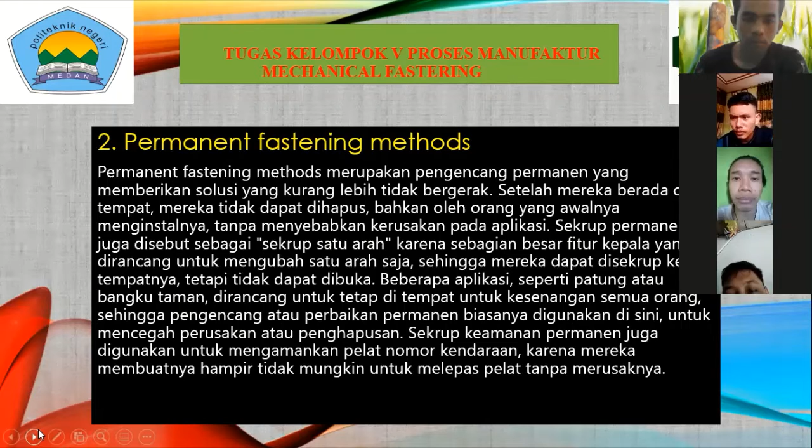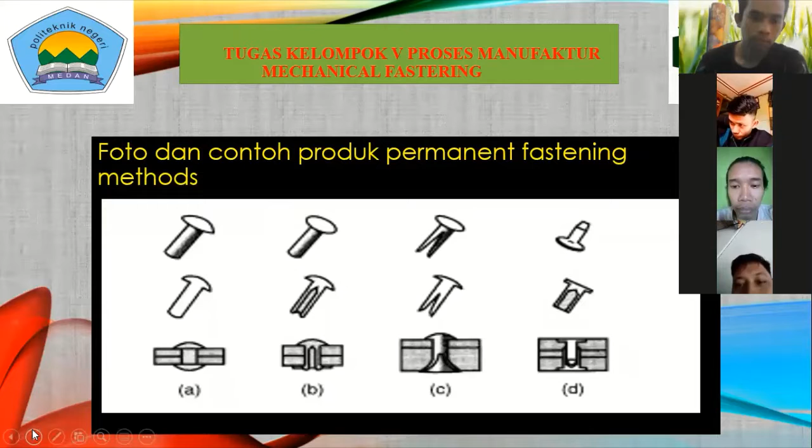If you work with designing, building or repairing things, one of the things that you should know about are the different types of fasteners. When it comes to putting things together, there are always lots of different ways that you can do it. Some materials can be chemically bonded, welded, soldered, or brazed together. Other situations call for adhesives like tape, glue, or epoxy. But today I want to talk about mechanical fasteners and explain the difference between some of the common types that you're likely to run into.

Mechanical fasteners are things like nails, screws, nuts, and bolts that we use to secure things to other things. If you've ever walked into a hardware store in search of a fastener, it would be easy to get overwhelmed by the variety of options available. How do you know which one you need? Fasteners come in different sizes and shapes, with different points, heads, drive types, materials, surface finishes, and surface coatings. There are thousands upon thousands of different varieties of mechanical fasteners, and for a given application there might only be a couple of options that will work properly.

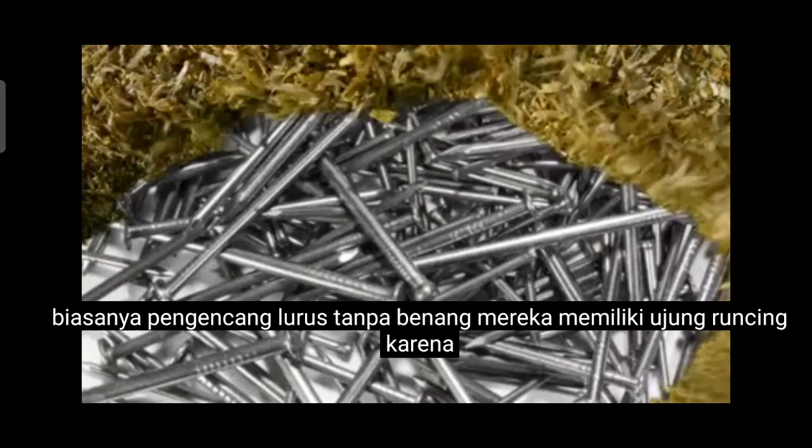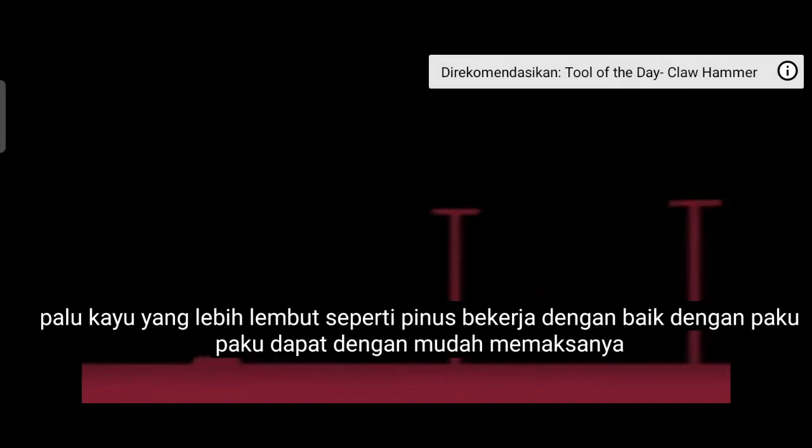The friendly staff at the hardware store can probably help you find what you need, but you don't want to be the ill-informed chump who goes in there not knowing the difference between nails and screws. So let's get down to the basics of mechanical fasteners. Nails are normally straight fasteners without threads. They have pointy tips because they're designed to be pounded into soft materials like wood, usually with a hammer. Softer woods like pine work well with nails. The nail can easily force its way into the soft material, and the wood presses back on the nail to hold it tightly in place.

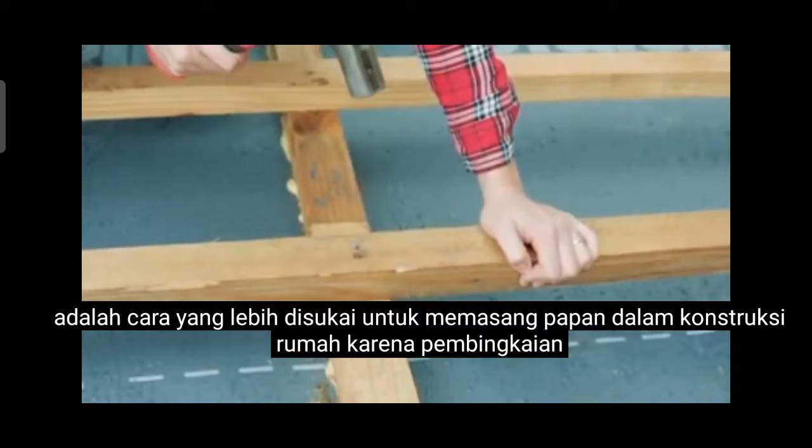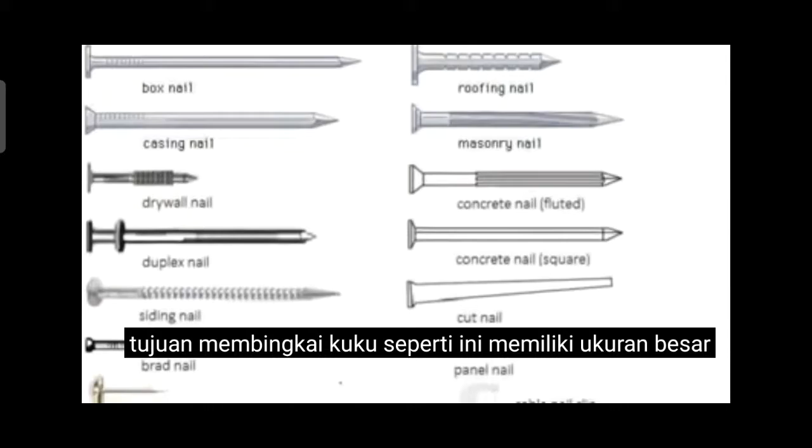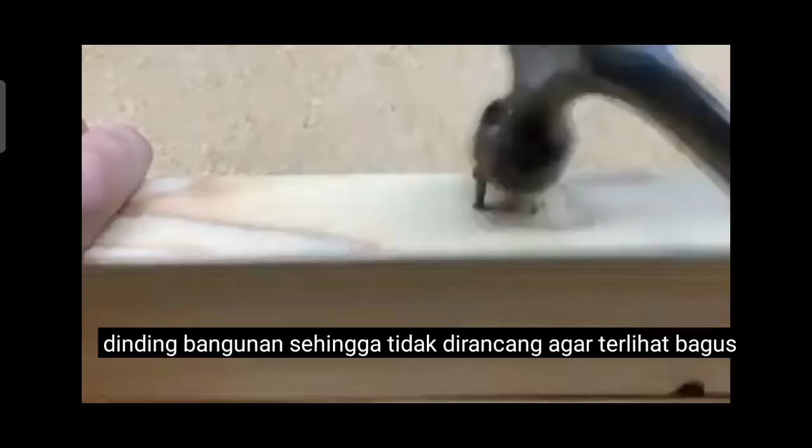Harder woods like oak or maple don't take nails so well, and are likely to split apart when the nails are driven into them. That's why nails are the preferred way to attach boards in home construction, because framing lumber is normally made from soft woods that are easy to nail. Like other fasteners, there are countless different types of nails used for different purposes. Framing nails like this one have large heads that are easy to pound with a hammer, and also easy to pry out if needed. These are usually hidden inside the walls of the building, so they aren't designed to look good. Finish nails are used for applications like trim and molding, where big ugly nail heads would be visible and unpleasant.

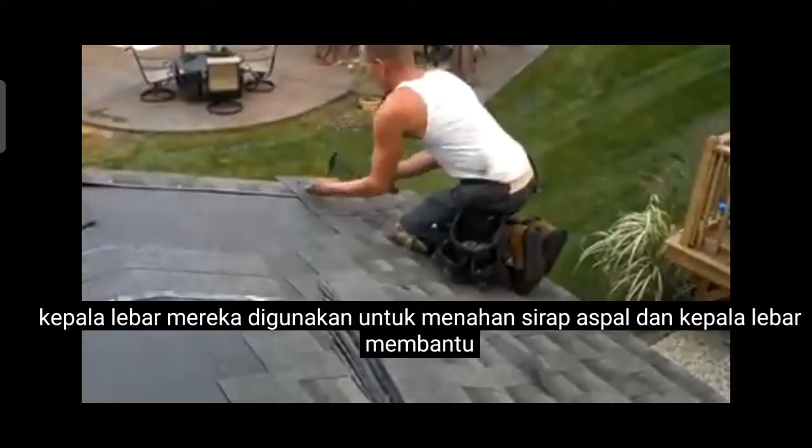Finish nails are thinner, so they'll be less likely to split the wood, and they have tiny little heads that are designed to be hard to see once they're driven in, or recessed beneath the surface to be covered with wood filler or putty. Roofing nails, on the other hand, are designed with big, wide heads. They're used to hold down asphalt shingles, and the wide head helps ensure that the nail will hold the shingle down without breaking through it. Roofing nails also have a galvanized coating that protects them from rust, since they need to work outside where they could be exposed to the elements.

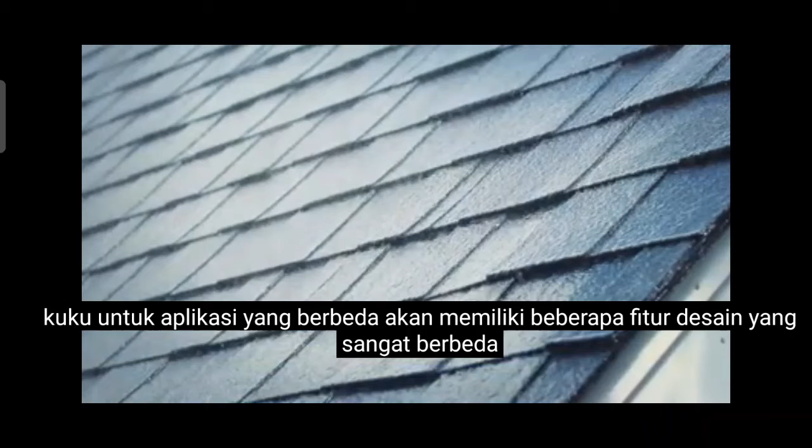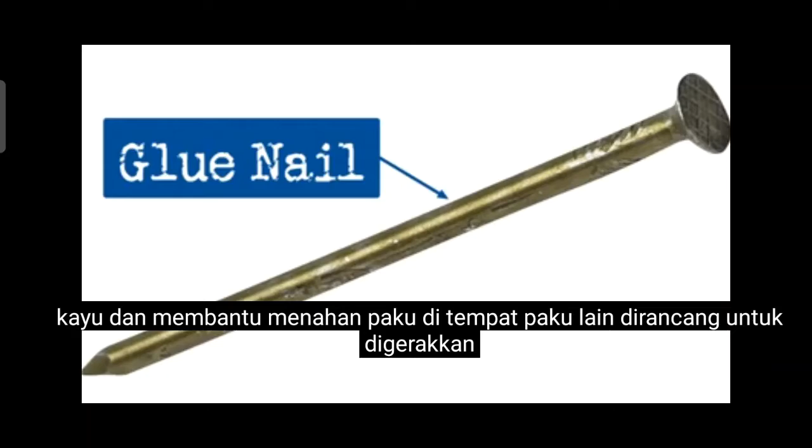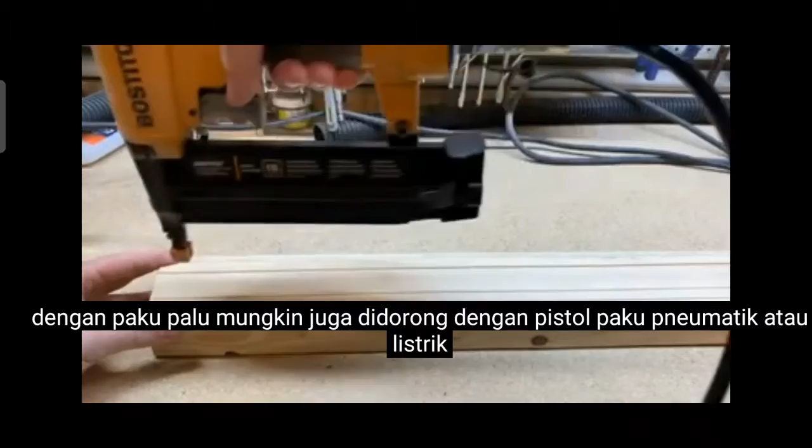Nails for different applications will have very different design features. Some have a coating of glue that melts from the friction of being driven into the wood and helps hold the nail in place. Other nails are designed to be driven into different materials like masonry or drywall. Besides just being pounded in with a hammer, nails might also be driven in with a pneumatic or electric nail gun. They can even be driven into especially tough materials using the explosive force of gunpowder.

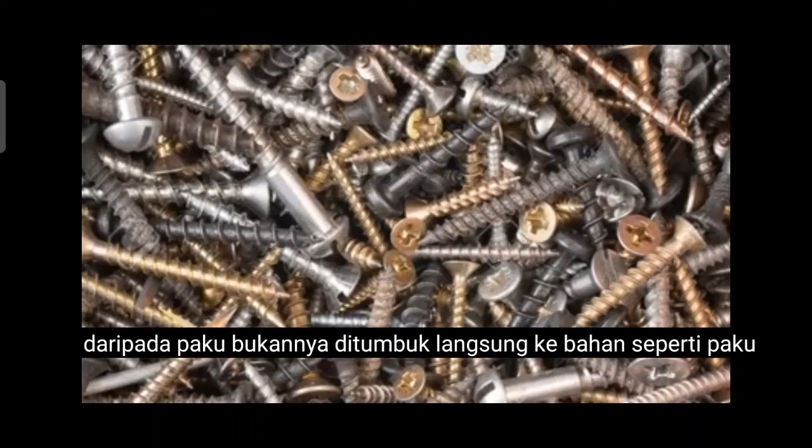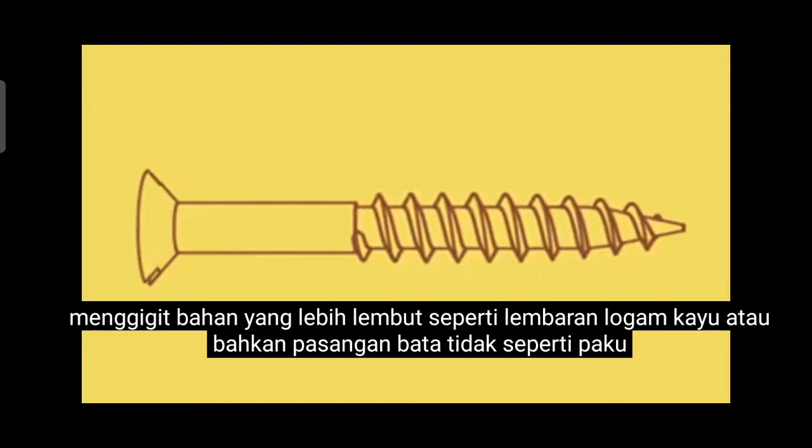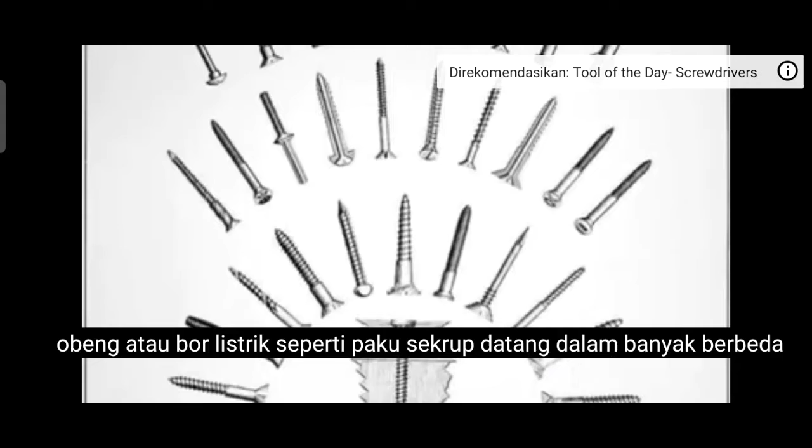Screws are a very different type of mechanical fastener than nails. Instead of being pounded straight into the material like a nail, screws have to be turned into the material. For a fastener to be a screw, that usually means that it has a sharp point and a long, coarse thread used to bite into softer materials like wood, sheet metal, or even masonry. Unlike nails, screws can usually be tightened, loosened, and taken in or out pretty easily using a screwdriver or electric drill. Like nails, screws come in lots of different sizes with different design features for different applications.

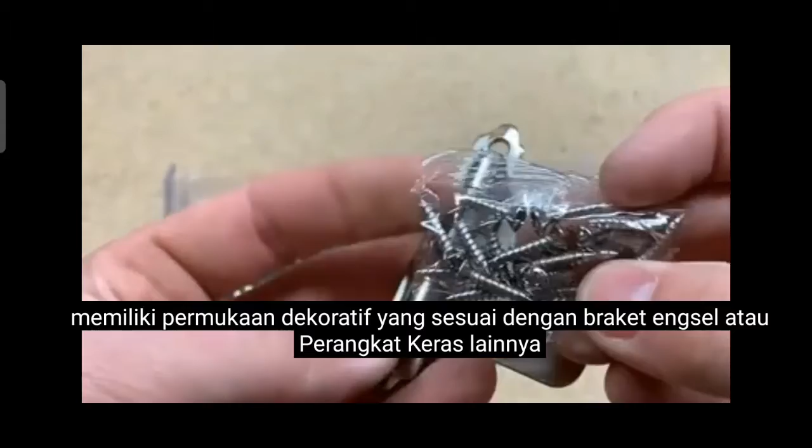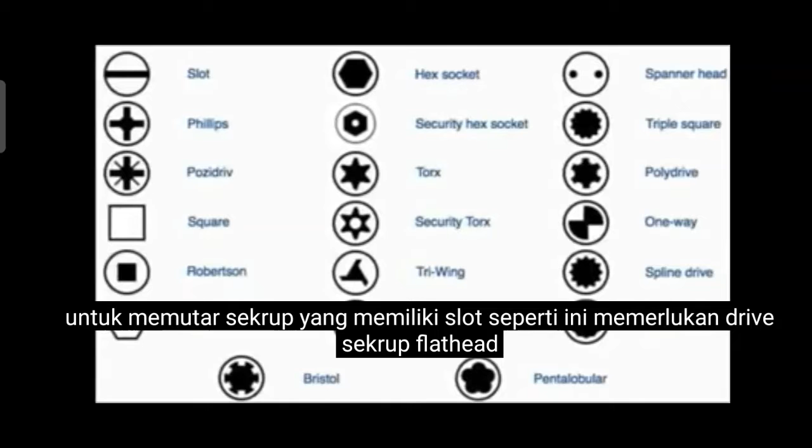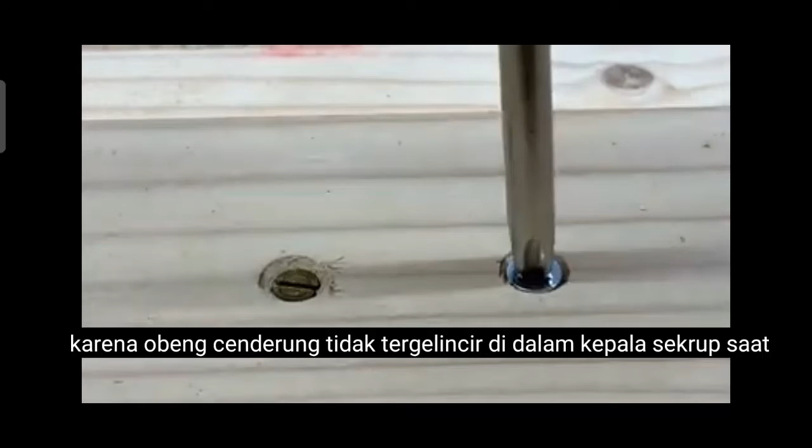Some have a weatherproof coating for outdoor applications like decking. Some have decorative surface finishes to match hinges, brackets, or other hardware. One of the biggest differences between types of screws is the type of drive used to turn the screw. Slotted screws like this one require a flathead screwdriver to turn them. Phillips head screws like this one have become more popular because the screwdriver is less likely to slip inside the screw head while driving the screw in or out.

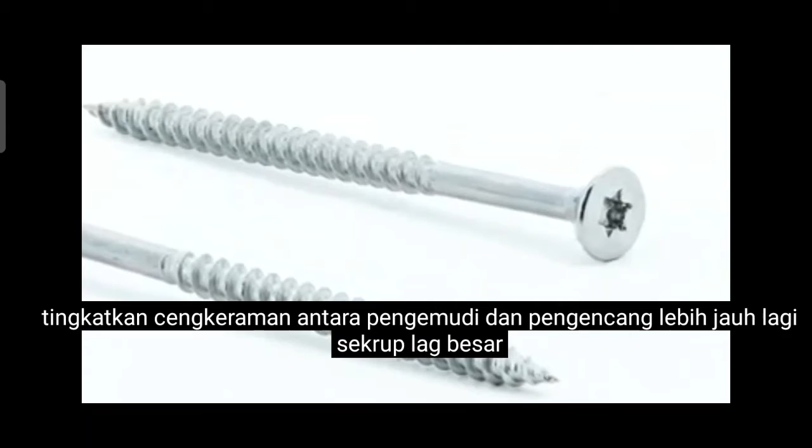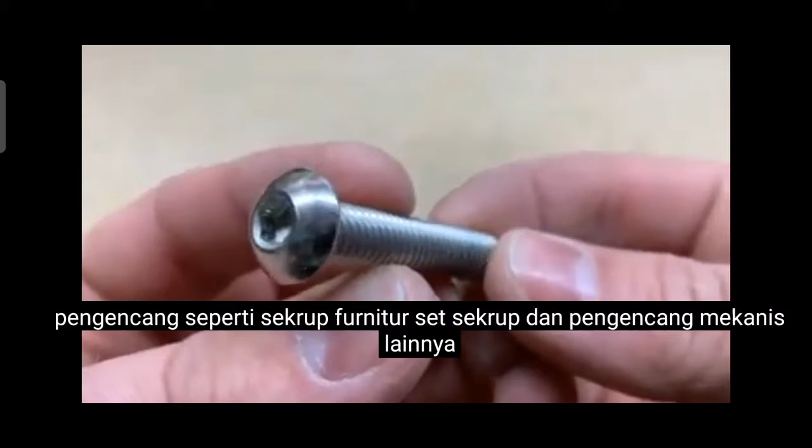Other screws might use a Torx drive like this one to enhance the grip between the driver and fastener even further. Large lag screws might use a hex drive that can be driven with a wrench, or some specialized fasteners like furniture screws, set screws, and other mechanical fasteners might use an inverted hex drive like this, which uses an Allen wrench to turn.

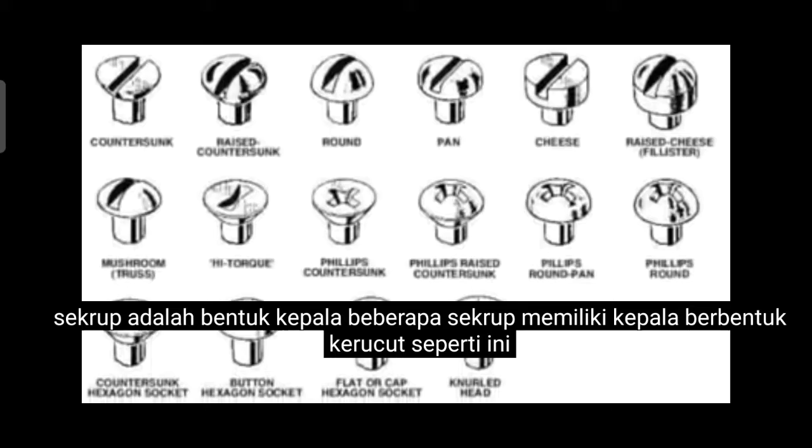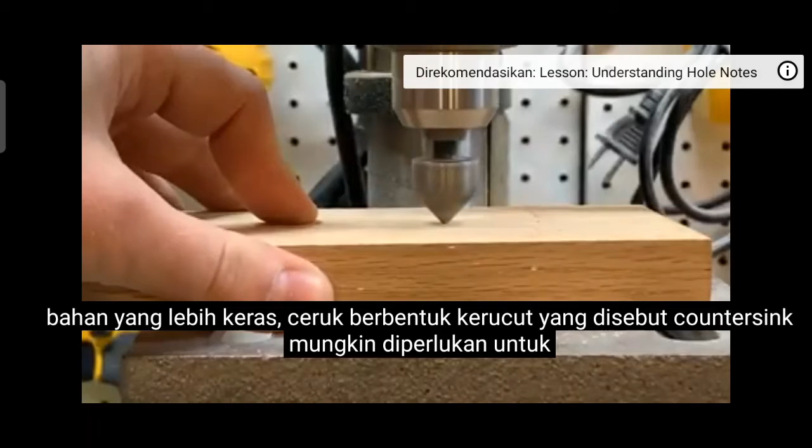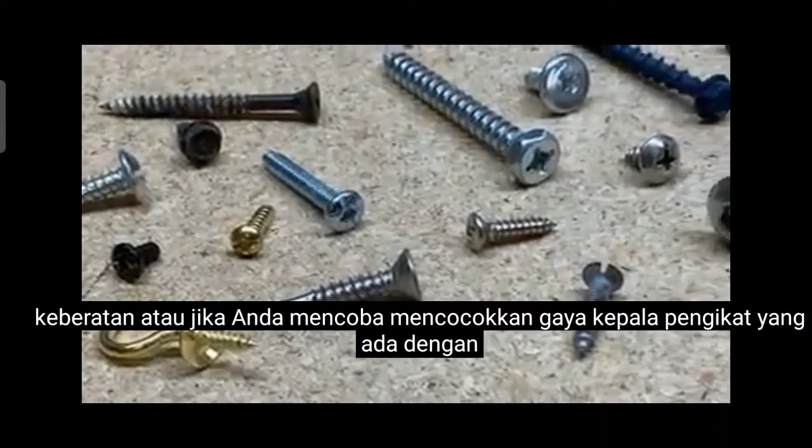Besides the type of drive, another important difference between types of screws is the shape of the head. Some screws have cone-shaped heads like this, which make them easier to recess below the surface of a piece of wood. In harder materials, a cone-shaped recess called a countersink might be needed to help recess the screw head. Other types of screws might have very differently shaped heads, which can be important if you have a very specific application in mind, or if you're trying to match the style of an existing fastener. Heads with a flat bottom are generally designed to sit on the surface of the material, but might also be recessed below the surface using a counterbore, or a larger hole that the screw head sits in.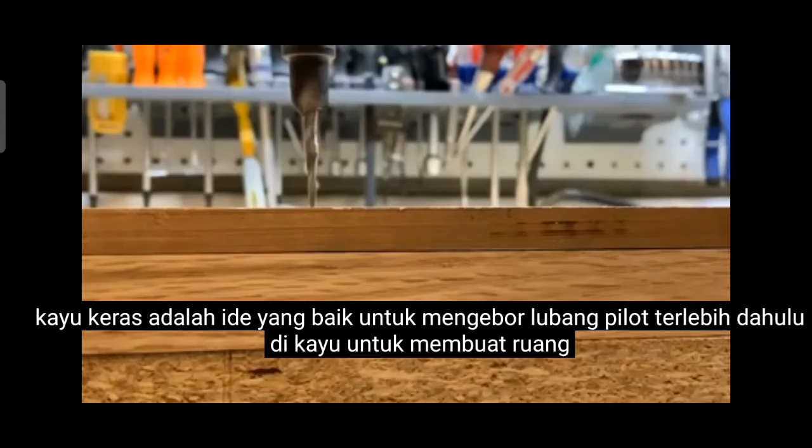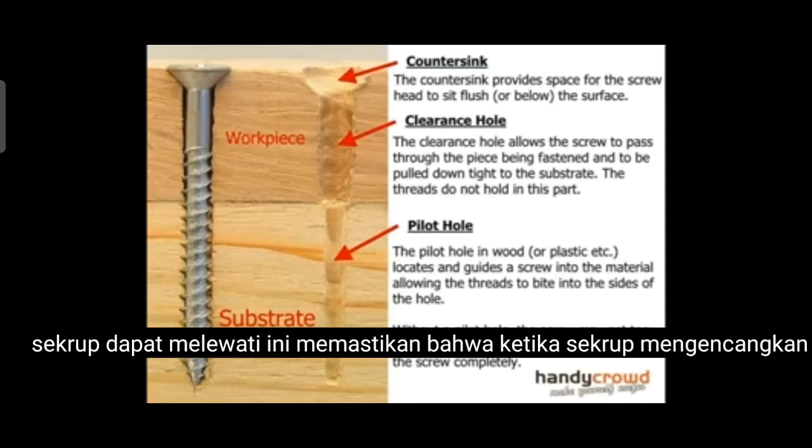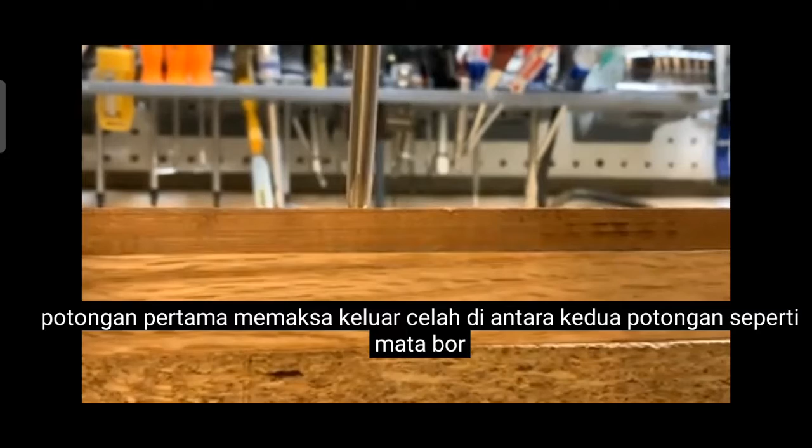Screws can wedge their own way into softer materials pretty easily, but when using screws in harder materials like hardwoods, it's a good idea to pre-drill a pilot hole in the wood to make space for the screw. The pilot hole is a little smaller than the threads on the screw, so the threads will still bite into the material and pull the pieces together. The first piece normally gets a bigger hole called a clearance hole that the screw can pass right through. This ensures that when the screw tightens, the threads will bite into the second piece and pull the screw head tight against the first piece, forcing out any gap between the two pieces. A drill bit like this one is designed to drill the pilot hole, clearance hole, and countersink all in one shot. So the next time you need a screw, you should have some idea what kind of screw you're looking for.

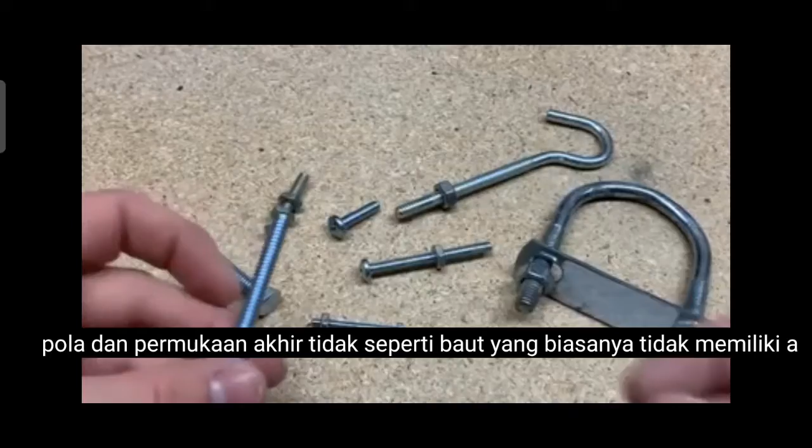Bolts and screws share some similarities. Some even go by misleading names that can be a little bit confusing, like a lag bolt or a set screw. But in general, the biggest difference between a bolt and a screw is that a bolt has much finer threads than a screw, which are designed to thread together with a matching threaded fastener instead of actually threading into the building material itself. Like screws, bolts come in all different shapes and sizes with different types of heads, drives, thread patterns, and surface finishes. Unlike screws, bolts normally don't have a pointed tip because they're designed to drop through a pre-drilled clearance hole and have no need to drive their way into the material.

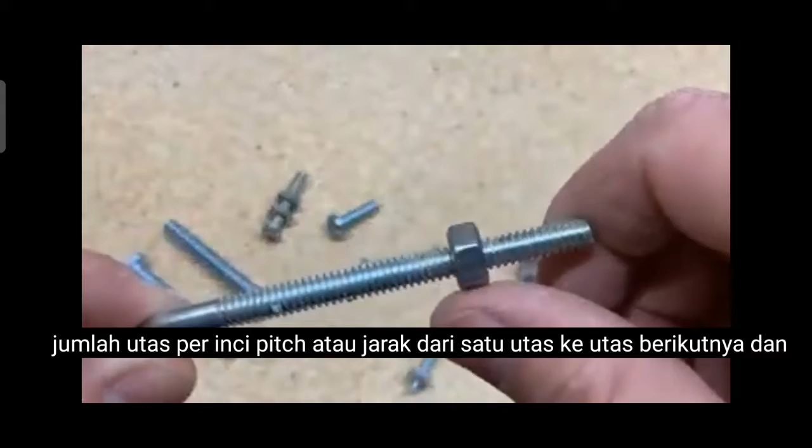The most important thing that distinguishes one bolt from another is probably its thread pattern. The thread pattern of a bolt or nut is very specific and standardized. The things that make one thread pattern different from another are its diameter, number of threads per inch, pitch or distance from one thread to the next, and allowance or the tightness or looseness of the fit between threads. There's a wide range of thread patterns used with standard measurements and with metric. Trying to connect a nut and bolt of two different thread patterns won't work. So it's important to use the correct thread whenever using threaded fasteners. An advantage of bolts over screws and nails is that they can be tightened with a wrench to be nearly as tight as you want.

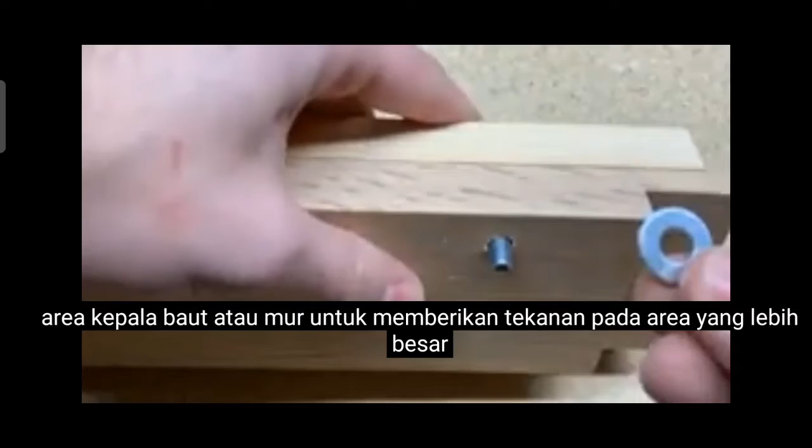They aren't so likely to snap off or strip out the threads inside the hole. Another piece of bolt is a washer, which is a flat ring, usually metal, with a hole that fits pretty closely around the bolt. The washer helps spread out the surface area of the bolt head or nut to apply pressure over a larger area. This gives the bolt head a bigger surface to grip and also prevents the head from forcing its

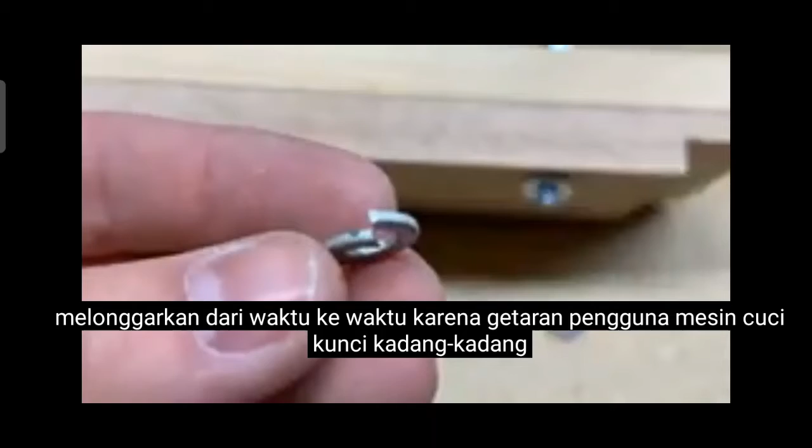way into the material. To prevent nuts and bolts from loosening over time due to use or vibrations, a lock washer is sometimes used to put a little outward pressure on the nut and bolt to prevent it from spinning off on its own. Like the other fasteners, washers come in a variety of styles and materials for different applications, and so do nuts. Acorn nuts might be used in decorative situations or to prevent snags on the loose end

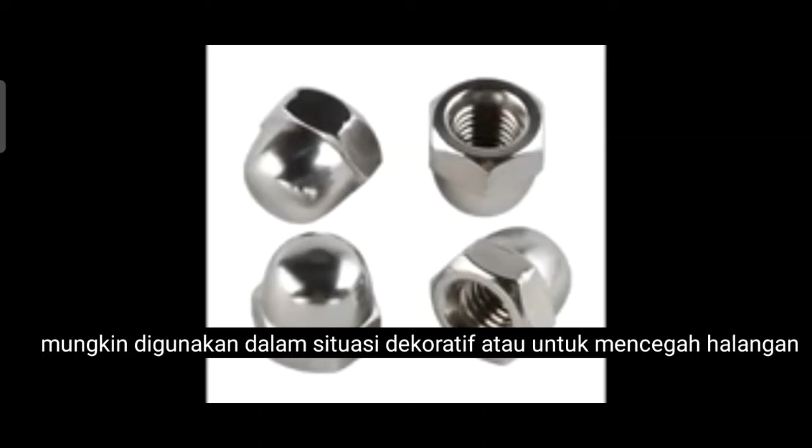of a bolt. Wing nuts are designed to be loosened and tightened by hand without the need for a wrench. Lock nuts have a nylon ring inside them that bites tightly onto the threads of the bolt to prevent it from coming loose, and the list goes on.

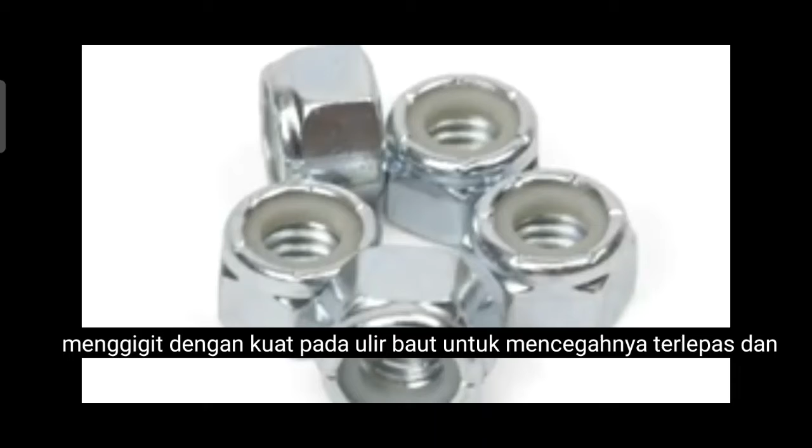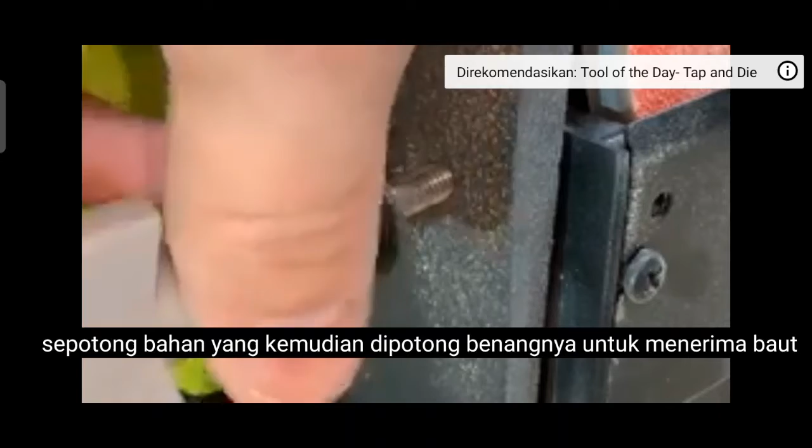In other situations, the bolt might not thread into a nut at all. It might be designed to thread into a tapped hole, which is a hole drilled into a piece of material that then has threads cut into it to receive a bolt. Just like the connection between a nut and a bolt, the thread pattern of the bolt must match the thread pattern of the tapped hole for this to work.

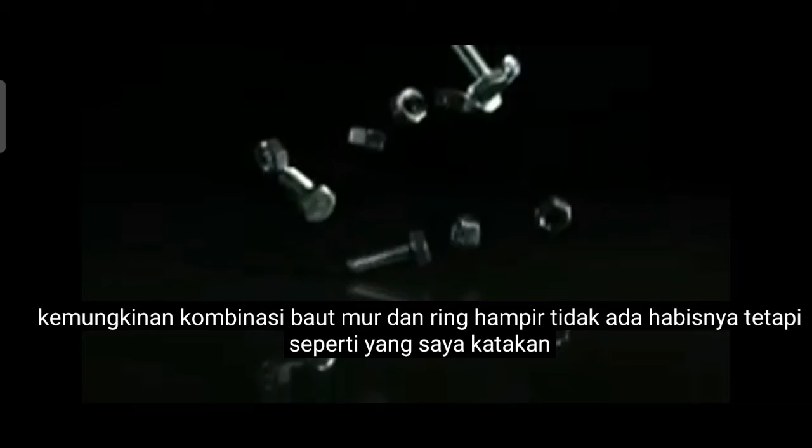The possible combinations of nuts, bolts, and washers is almost endless. But as I said before, there's probably only a few combinations that will work properly for a given application. So the more you know about the possibilities, the more likely you are to make the right choice.

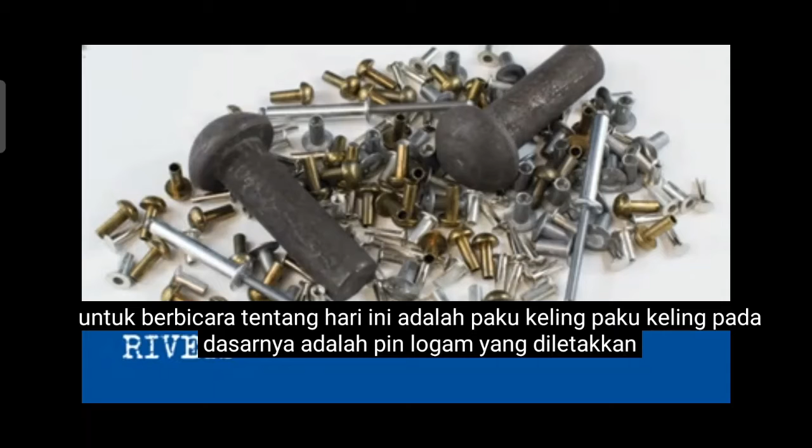The last type of mechanical fastener I want to talk about today is the rivet. A rivet is basically a metal pin that is put through a hole, then widened on each side so it can't slide back out again. With a tight enough fit, rivets can secure things extremely well. Rivets are used to hold together lots of different kinds of materials, including sheet metal, plastic, leather, fabric, and plenty of others.

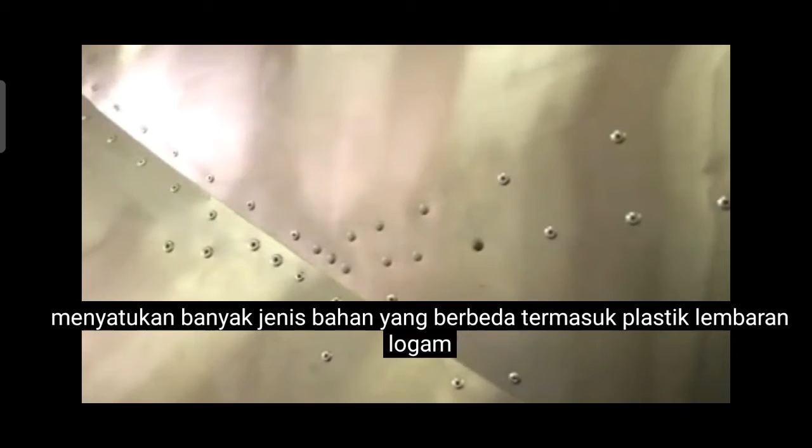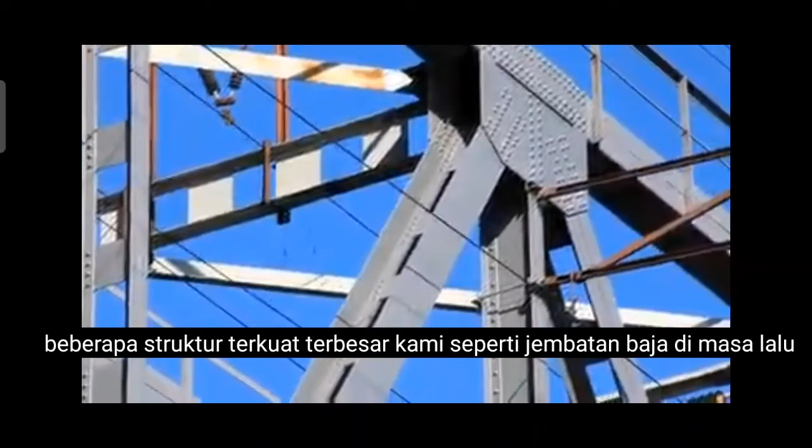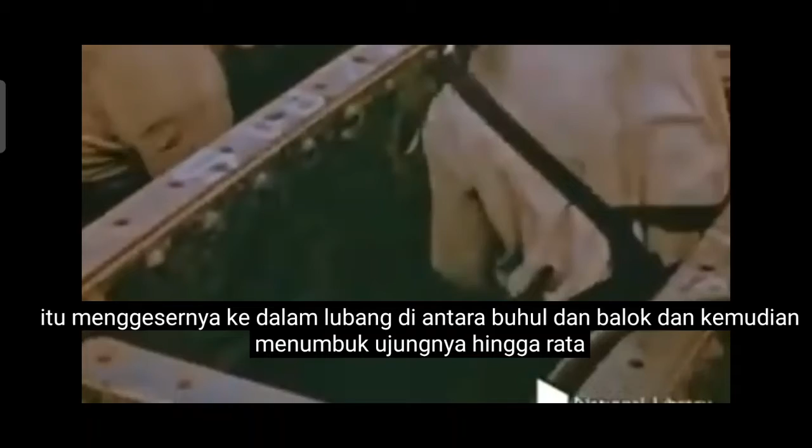Rivets are even used to hold together some of our biggest, strongest structures, like steel bridges. In the days of old, iron workers would have to heat up rivets in a furnace until they were red hot, then quickly throw the red-hot rivet to another worker who would catch it, slide it into a hole between a gusset and beam, and then pound the ends flat before the rivet could cool off. Nowadays, installing rivets is a little easier.

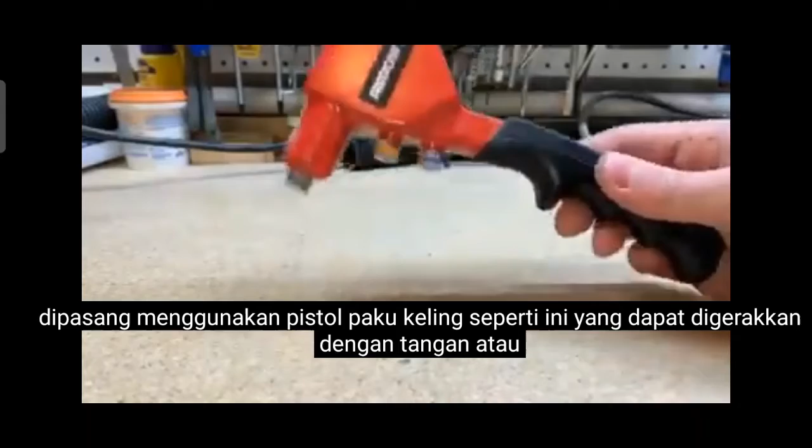Pop rivets like this one are cheap and easy for people to use at home. They're installed using a rivet gun like this one, which can be hand-powered or pneumatic. First, a hole is drilled through the pieces that the rivet will connect. Then the rivet slides through the hole.

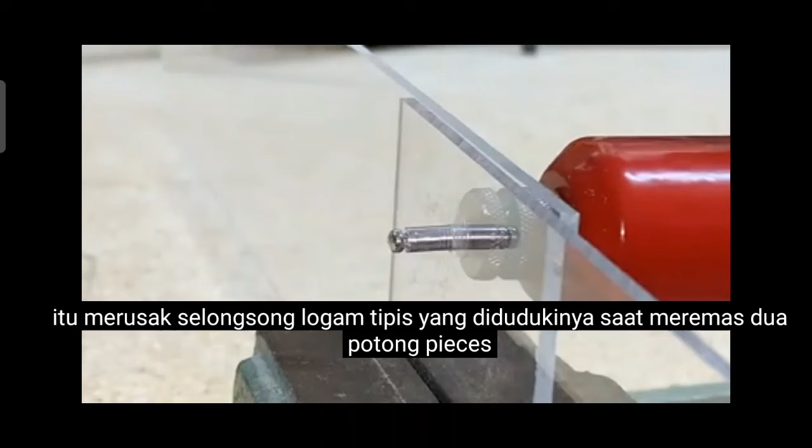The pin end goes into the rivet gun, and when you squeeze the handle, the pin is pulled back toward you. On the way, it deforms the thin metal sleeve that it sits in, squeezing the two pieces of material tightly together. When it can't tighten anymore, the pin breaks off, leaving the expanded rivet tightly in place with a smooth, clean-looking face on the outside. Several rivets together make an even stronger connection.

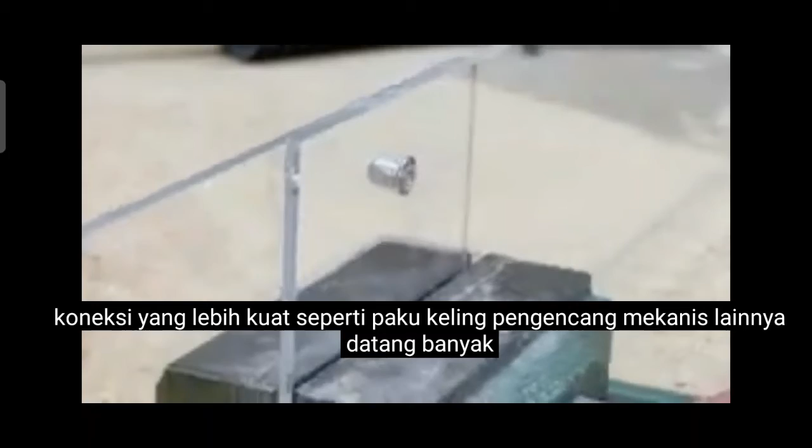Just like other mechanical fasteners, rivets come in lots of sizes and varieties. The length of the rivet dictates the thickness of material that it can join. Different diameters have different amounts of holding strength and require different sized holes to be drilled. Steel rivets are tougher and harder to install and remove than aluminum ones.

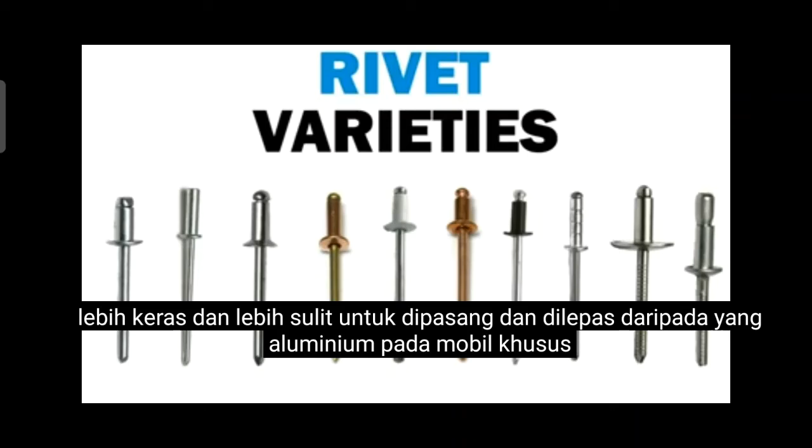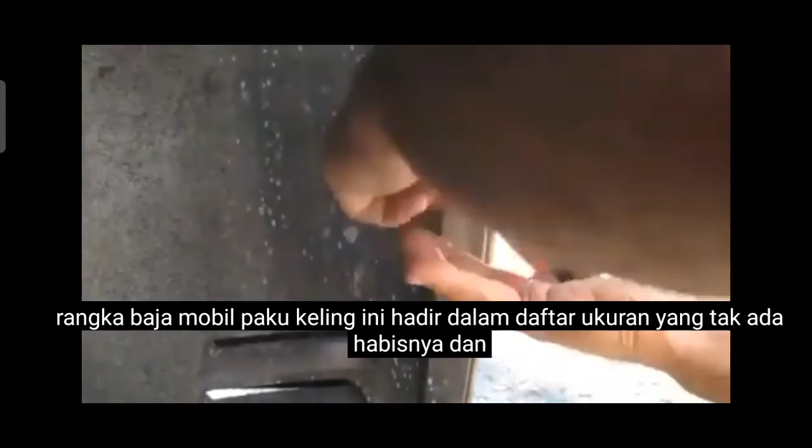On cars, special plastic rivets are often used to secure plastic body panels to metal ones or to the steel frame of the car. These rivets come in an endless list of sizes and styles, many of which are specific to certain types of vehicles. So it pays to know exactly what you're looking for if you ever need to go to the store looking

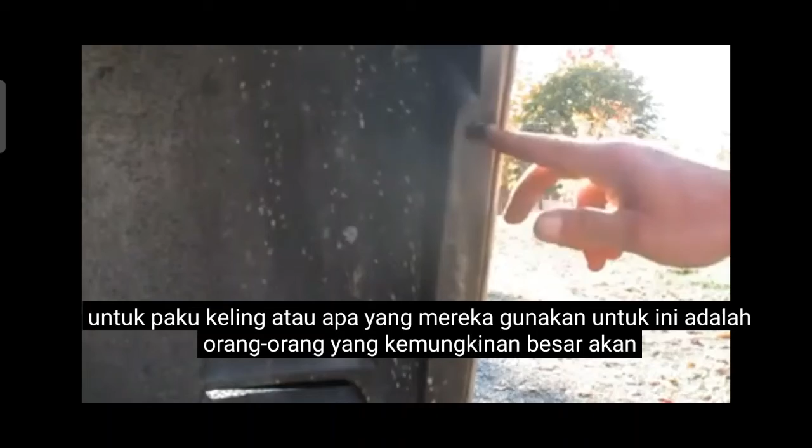for rivets. Some people will never know the difference between the types of mechanical fasteners or what they're used for. These are the people who will likely have to hire someone else to do simple jobs and repairs for them around the house. Even things as simple as hanging a picture frame or assembling a piece of furniture become a whole lot more difficult if you don't understand the basics of tools and fasteners.